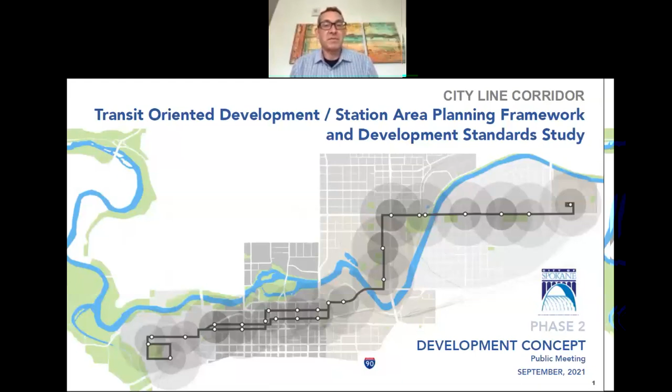That looks great. So as Colin mentioned, we're at phase 2 of what's called a Transit-Oriented Development Study, primarily for the City Line, which is a bus rapid transit line being constructed in downtown Spokane. Let's go to the next slide.

TOD, if you're not familiar, is land use and transportation integrated together with a transit route at its core. That typically includes a mix of housing, commercial businesses, jobs, and services concentrated along walkable and bikeable streets within a quarter mile of that transit route.

Why TOD in Spokane? It's interesting—transit-oriented development really meets market demands for mixed use, walkable development in urban areas. And in Spokane in particular, it's relevant to the city's growth strategy for investment along what are called high frequency transit corridors.

Our study purpose is to identify an approach for transit-supportive regulatory changes and priority infrastructure investments, things like walk and bike improvements that support these high frequency transit corridors.

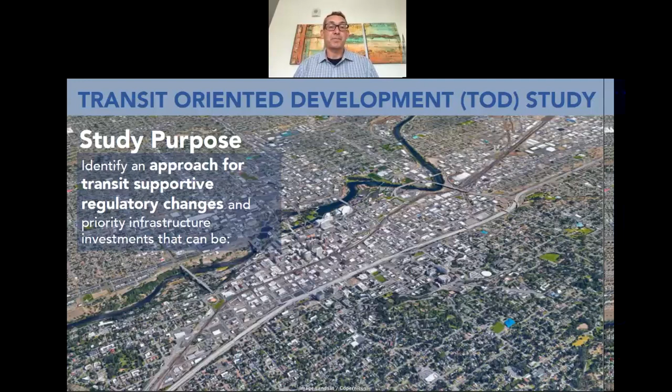Those include the City Line, which you see here in blue under construction, as well as a line along Division, Monroe, Regal, and Sprague. And in conjunction with supporting transit-oriented development along these high-frequency transit corridors...

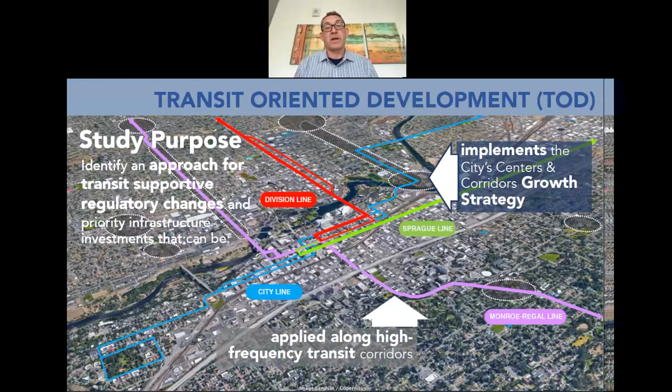We're also interested in implementing the city's comprehensive plan, which has looked for particular areas for infill and redevelopment. Much of these sites, called centers and corridors, align with the high-frequency transit routes. So we've got a bit of a dual purpose here.

As I mentioned, the City Line is the project we're studying—our initial test site, so to speak. That alignment is 6 miles long, beginning on the west at Browne's Addition, moving through downtown, north up through the University District and Logan neighborhood, and then continuing east through Chief Garry to its terminus at Spokane Community College. That's going to include 28 stations within these 5 districts.

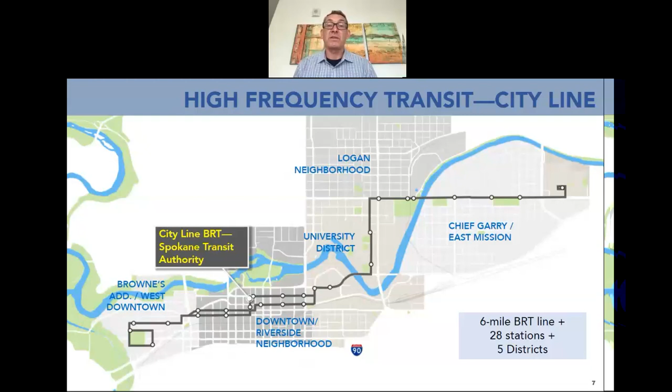The City Line is a $92 million investment in the corridor, and its core is creating premium transit service, starting with a comfortable and low-impact electric vehicle—so lower noise, less emissions. The line will run frequently throughout the day: peak time, 7.5 minutes between buses, up to about 15 minutes between buses later in the day. So reliable and frequent.

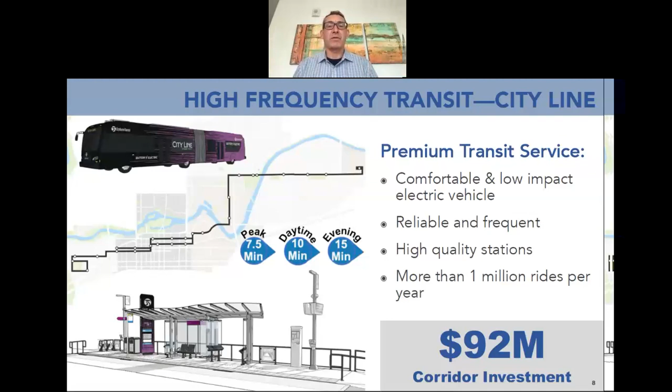STA is then constructing a number of high quality stations, which we often call platforms, that allow for level boarding of the bus. There'll be covered shelters, ticketing you can purchase at the station, they'll be well lit, and they'll include things such as reader boards so you know when the next bus is coming. That $92 million investment is really intended to promote increased value along the corridor.

The estimate is $175 million. For our work, we want to look at a particular section of the City Line to look at what the opportunities are for transit-oriented development to help leverage that growth strategy—not only in the investment in infrastructure for the bus, but how we can promote future development that uniquely serves a number of districts within our study area.

So that includes the Cincinnati Street corridor and the Mission Avenue corridor, and then those stations that run between the river and Spokane Community College.

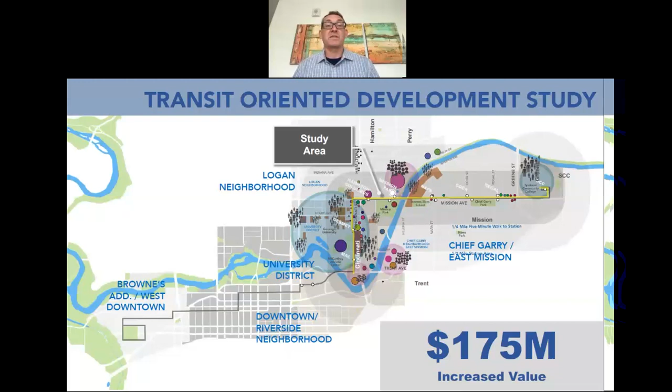The work we're doing to get to regulations really needs to be preceded by an understanding of the context along the corridor and creating what we call a station area planning framework. That's guided by three principles, three elements we're really focused on when looking at access to stations and what future development might be in the context of any given station area.

The first is we want to establish a multimodal transportation corridor so that we're linking station to station with continuous biking and walking facilities.

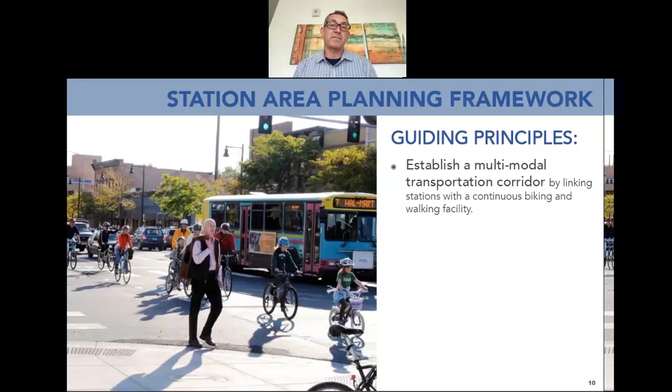We want to look to increase potential ridership through development and activity that support an active station environment, as well as walking and biking improvements that provide direct access between transit and the destinations people wish to go to at each station area.

Finally, we want to enable the station areas to achieve their development potential by supporting transit-oriented infill or redevelopment properties for people to live and businesses to thrive near transit.

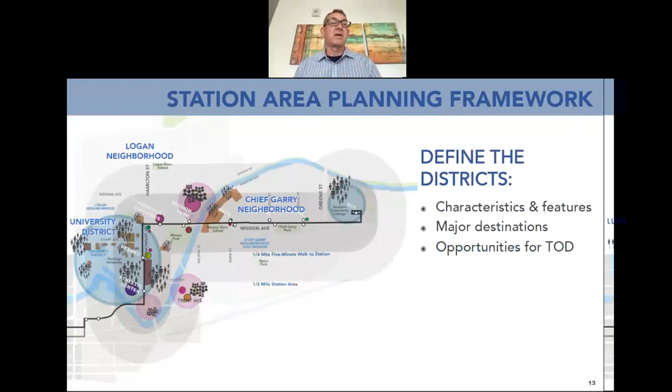Our work then looks to define each of these districts - the University District, Logan Neighborhood, and Chief Garry - to identify their basic characteristics, the major destinations, and where opportunities for TOD might exist.

The TOD opportunities tend to be within areas of aging manufacturing and warehouse sites, vacant underutilized sites, and large parking lots. The Centennial Trail is another key feature running through this station area.

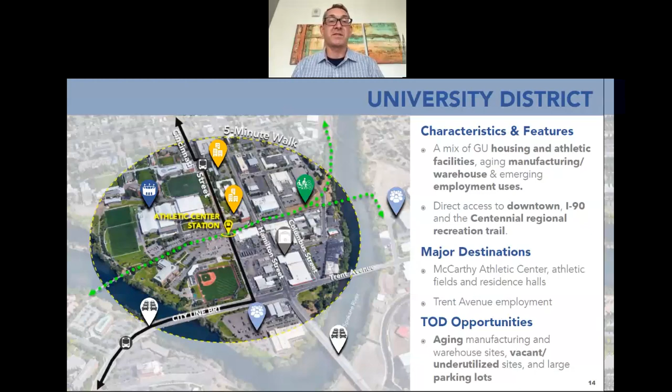As we progress north to DeSmet, this begins our transition between core Gonzaga University and some commercial uses on Hamilton into the Logan neighborhood. The Hamilton corridor is the nexus and spine of the station area between the DeSmet and Columbus Street stations. The major destination along Hamilton, from a rider perspective, is the Safeway grocery store.

As we move east along Mission Avenue, Mission Park is a major destination. We have a major employer with Avista, and of course the Aquatic Center. So there are a number of destinations - university, shopping, recreation, and employment - within this corridor. Primarily the TOD opportunities are oriented along Hamilton Street.

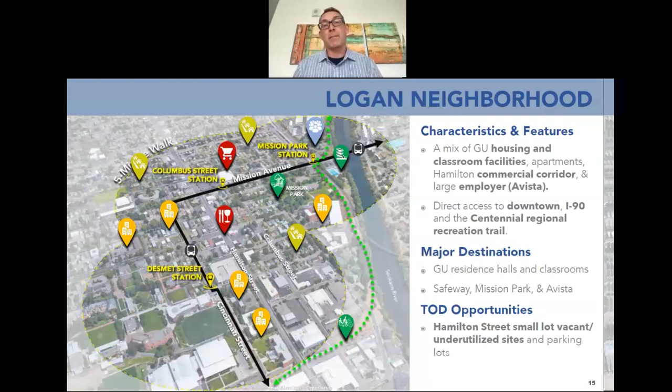As we transition further east along Mission Avenue, we cross the Spokane River and come into the Chief Garry neighborhood, which is predominantly single-family housing. There are pockets of riverfront apartments and multifamily housing along the Spokane River, and auto-oriented commercial industrial uses, primarily concentrated around Napa and Regal Street.

Clearly one of the primary destinations is Spokane Community College at the terminus of the alignment, but there are also a number of destinations that include the Stevens School and Chief Garry Park. The transit-oriented development opportunities tend to be along Mission Avenue at the station locations at Napa and Regal, where you have aging commercial, manufacturing, vacant, and underutilized sites.

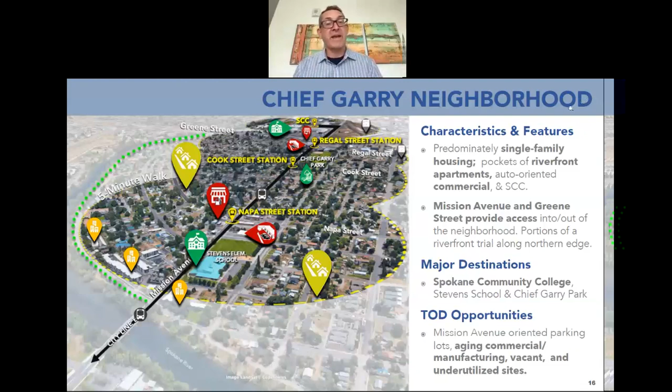Our first framework element that we want to address, having understood the basic context, is establishing what we call station area access routes. They'll address the need for station-to-station and station-to-destination access improvements. We'll look to fill gaps and propose new routes that complete the city's adopted pedestrian and bike plan networks, and will inform potential future infrastructure improvements that support transit access.

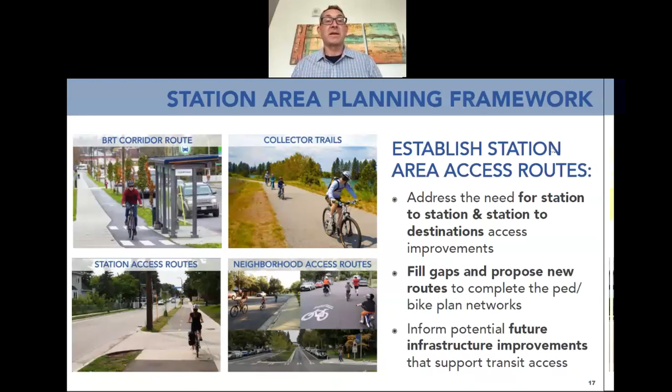We did an initial review and assessment of each of the station areas, and looked at where destinations existed, what were barriers to transit, what were barriers to potential transit-oriented development sites, and where areas lacked basic walk or bicycle facilities. That assessment led us to these primary findings.

First, we need to address Mission, Greene, and Hamilton due to the high level of traffic speeds and the need to improve safe crossings along those three roadways. Mission in particular lacks any bicycle facilities, as does Napa, which serves as a north-south connector within the Chief Garry neighborhood. But there are some really robust facilities on Sharp Avenue and Perry that just need to be extended to complete those networks.

There are gaps in the Riverfront Trail, primarily south of Mission Avenue on the east side of the river. Through our analysis, we were able to determine areas with auto, pedestrian, and bike conflicts where there's been accidents - for instance, locations where safe routes to schools could be improved because of a lack of sidewalks. So we want to create these station access routes that can address all of these topics.

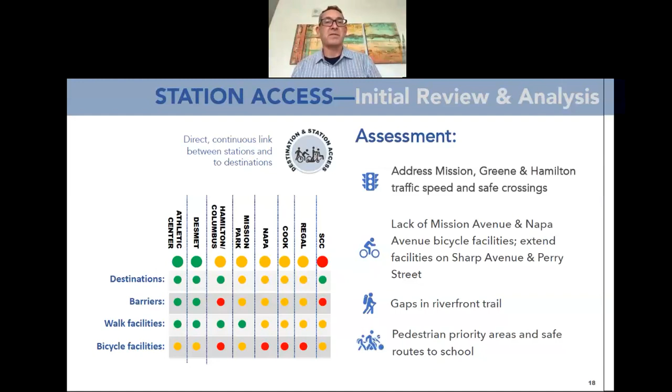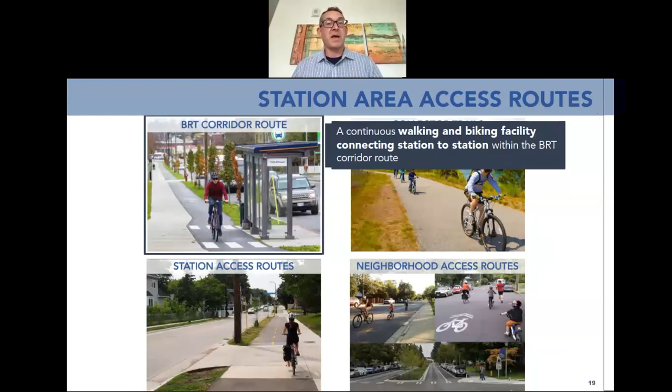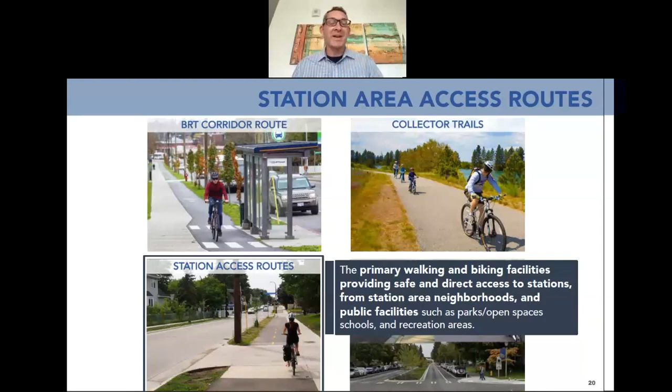The first hierarchy of routes is the BRT corridor route, which promotes a continuous walking and biking facility that connects station to station along the corridor. The next is the station access routes, which are primary streets for walking and biking that connect directly to the station from station area neighborhoods and public facilities.

Collector trails represent those access routes on the outer edges of the station area. These are part of your citywide and regional trail system, but they interconnect and in some instances intersect with the BRT corridor or other key routes that connect neighbors to destinations. So that's part of the system.

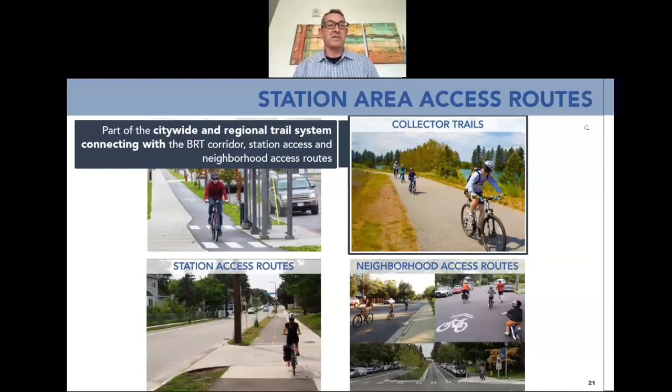Finally, neighborhood access routes are concerned with how we link neighborhoods to destinations within the neighborhood. Where it intersects with routes that feed to the station is also important, but we're also looking for connections that link schools to parks, for instance, which may run parallel to the BRT corridor. That establishes the framework for station area access within this study area, approximately a half mile from the stations.

I'll pause here for questions, but more importantly, have you all look at a survey question we have around station access routes. Okay, I have a poll here, and it's live, so feel free to answer a couple questions. Just want initial thoughts and reactions to this network.

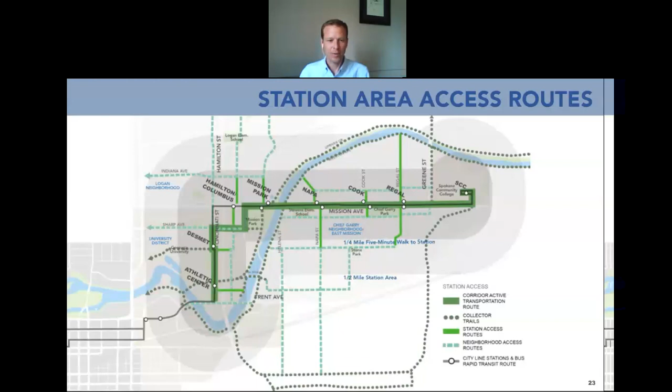So I'll close that and take it away, Jason. Great, let's move on to the next slide. This is going better than expected.

The next piece of the framework is looking at land use and transit-oriented development potential. Not all stations are the same, and not all development opportunities in station areas are similar—you tend to have varying degrees of intensity and certain types of development. Typologies help us support the neighborhoods we've defined and their district character and function, as well as inform the type and intensity of development and station access. Thirdly, we respond to local growth policies and plans, such as ped and bike plans and the comprehensive plan, looking at all three together as we establish these typologies for development.

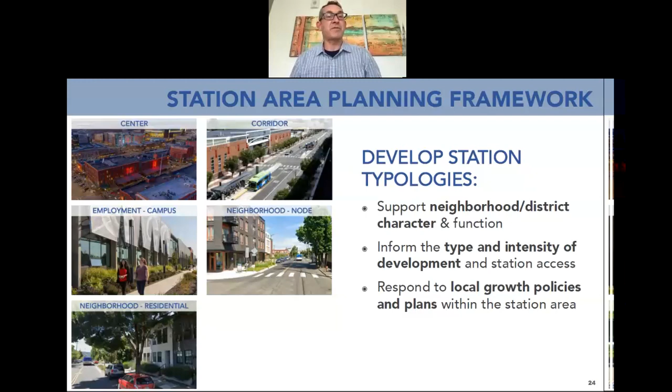The first typology is what we call a center station, typified by the highest density of development—apartments, condominiums, and townhomes—integrated with single-use or mixed-use buildings that include street-oriented commercial. Largely this type of development is at a district scale, quite often includes employment and some public amenities, and of course safe, direct, and convenient walk and bike access between the stations and development within that station area.

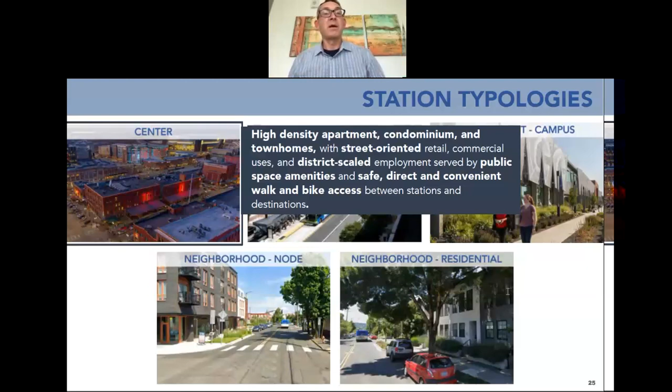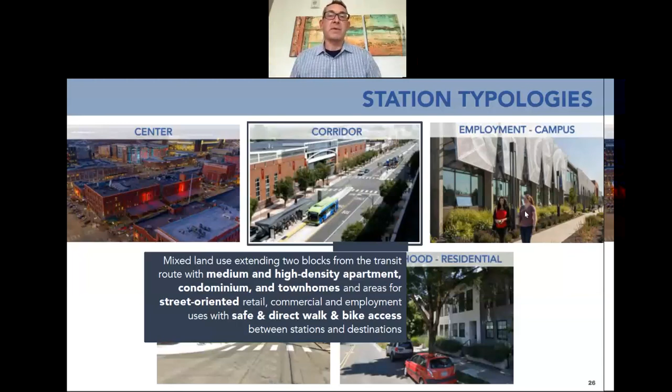The corridor is another piece that tends to be a linear connection—like Hamilton Street or Division Street—the physical form of a corridor. In a corridor-type station, development tends to be close to the alignment itself, with a mix of land use extending approximately two blocks from the primary transit route. It includes a variety of medium and high density apartments, condominiums, and townhomes, but also street-oriented retail and commercial, and safe, direct access to transit. It tends to be linear and doesn't extend too far from the transit corridor.

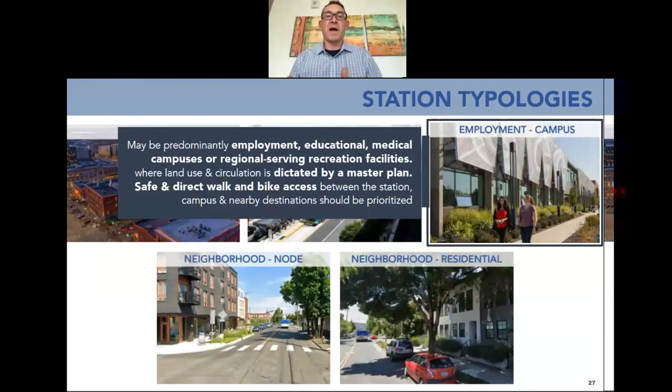Along the city line, we have Spokane Community College, Gonzaga University, and the Avista headquarters. These tend to be large areas that are master planned, usually by a university or a major employer, and largely decisions about land use and to some degree circulation are dictated by a master plan. It tends to be highly coordinated between the city and those large property owners.

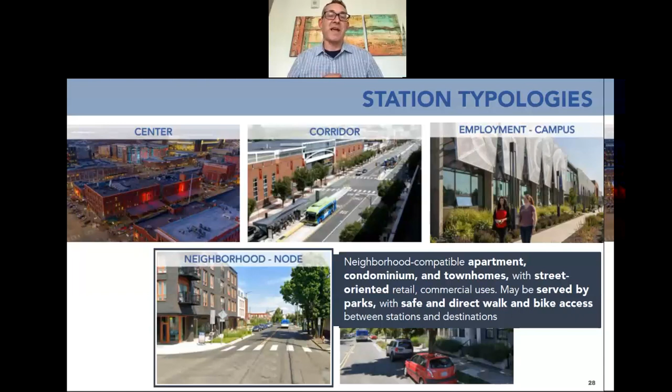As we ratchet down the scale from a center or corridor, we see in Spokane these unique neighborhood nodes, where there's the opportunity to create neighborhood compatible apartments, condominiums and townhomes—adding multifamily to what are typically single family neighborhoods, but along certain corridors. These nodes provide street-oriented retail, commercial, and neighborhood-serving uses, and promote access to transit to those destinations within the scale of a neighborhood node.

Next slide. Portions of a BRT alignment can have stations predominantly surrounded by existing single-family residential, where opportunities for development are fairly limited, but there may be opportunities for infill housing. These areas tend to be close to neighborhood parks and sometimes schools, and walk and bike access is critical to link residents, destinations, and stations.

So that encompasses five typologies that we've identified along the city line corridor in our study area. Next slide. If we could pause for one second, we had a question in the chat from Colleen about what the time frame is for action on these things.

I think it was in reference to the station area access network, but also all these things, so I can address that a little bit. And I should have introduced everyone from the city as well who's on the meeting: Tirrell Black, principal planner in the planning services department, and Amanda Beck, assistant planner.

I would say overall some of the policy and regulation changes would be the first outcomes of this study—comp plan amendments and that type of thing, and potentially zoning changes, but that would be a follow-up to this study. As far as infrastructure improvements, things already in our master plans would be quicker; they could be done as streets are resurfaced, as part of the plan. Things already part of the plan could be done more quickly, but things that are new and need more vetting from all the city departments would be a little further out to get into the plan and then acted upon.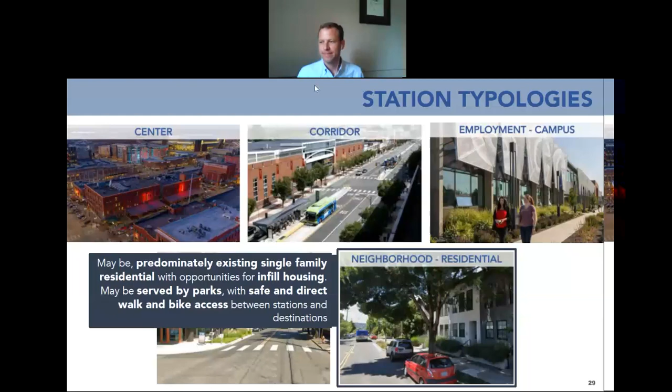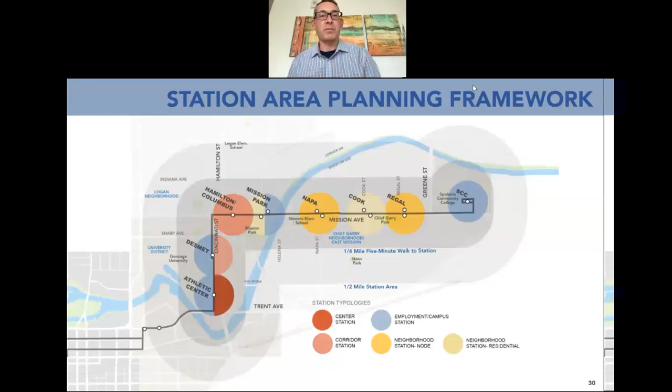Those typologies have then been arrayed along the city line alignment. So now that we have a basic understanding about the districts and some of the impediments to access, it's time to look at where the opportunities for transit-oriented development might occur. That's the next piece of the framework. Next slide.

And transit-oriented development tends to follow this pattern. We're looking for infill sites, so opportunities that include vacant and underutilized sites, or for instance, large parking sites where there's multiple properties with a single owner. That, I think, to Colleen's point, is where we see change potentially happen sooner rather than later.

The other thing is that we have to be cognizant of the station area assets and barriers to transit-oriented development. That could be a lack of interest in redevelopment, or the design of streets and access improvements that are really making it difficult for pedestrian-oriented development to succeed.

And I think on the upside, we can also look in neighborhoods and identify where there's certain types of development that haven't occurred today that might actually be ideally suited for transit-oriented development, providing housing choice, commercial services, a small amount of employment close to residents, and opportunities to improve public facilities such as parks and access to schools. So let's go to the next slide.

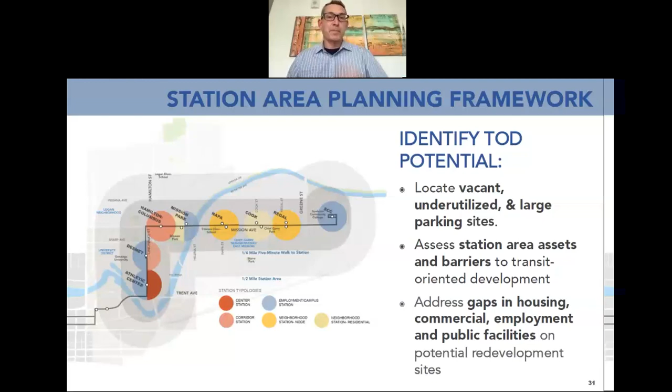In our initial review and analysis, we looked at these factors: do stations have transit-supported development today that we can build off of, or are they lacking? In certain station areas, what are the gaps in development? Is it a lack of multifamily, or employment, or commercial and retail uses within a given station area?

We also looked at the city's analysis on displacement risk, knowing areas that tend to be more susceptible to displacement with redevelopment than others. And then finally, on the ground, physically looking at vacant, underutilized, and potential redevelopment areas and mapping those within each of the station areas.

So 3 stations really surfaced as potential areas to look at development scenarios: transit-oriented development scenarios at the McCarthey Athletic Center, at the Napa station, and at the Regal station. The Athletic Center station is on Cincinnati, down near the river. Napa is at Mission and Napa, and Regal is at Regal and Mission.

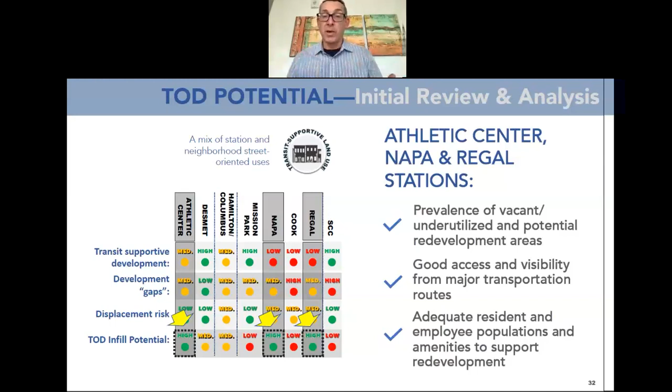And here's what we found: those 3 sites, with prevalence of vacant, underutilized, and potential redevelopment areas, all have good access and visibility for major transportation routes, meaning we're not relying on future people living in the neighborhood to support different uses. There's typically infrastructure in place today to help support redevelopment, including an adequate resident or employee population and amenities likely to support redevelopment.

We're going to start first with the McCarthey Athletic Center, designated in the comprehensive plan as what's called a center, which tends to mean higher density mixed-use development associated with this corridor along Hamilton. The desire of the comprehensive plan is to stimulate pedestrian activity with mutually reinforcing land uses. As part of this study, we want to add the layer of integrating development and transit with improved walk and bike access along key routes.

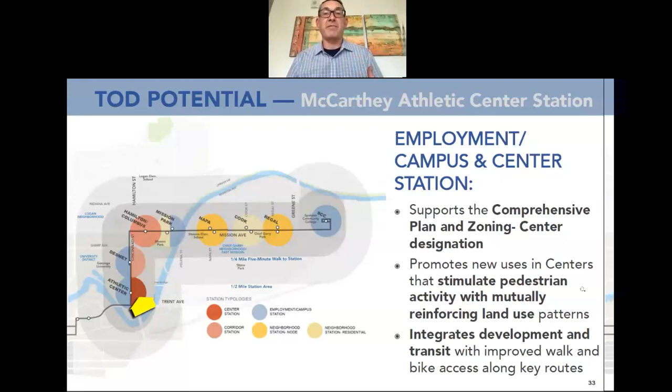So let's take a look at what a transit-oriented development scenario might be for the McCarthey Athletic Center. Looking at the station assets, there are some basic fundamentals that support redevelopment in this district.

The first is the drive-by traffic, high visibility along the Hamilton Street and Trent Avenue corridors. There's great access to downtown, great access to I-90. You generally have some built-in population to support housing, commercial development, and dining, including the Gonzaga University resident and staff population. There are some employment uses nearby.

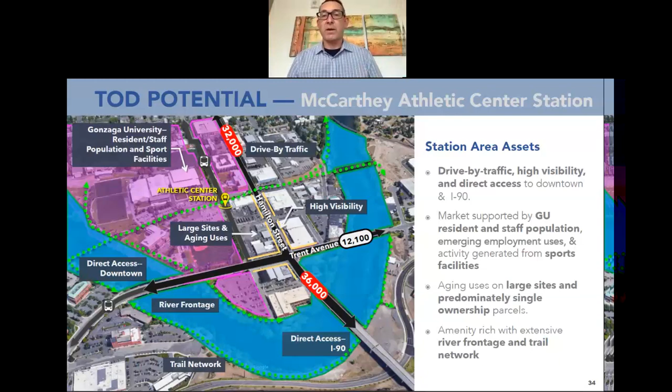The opportunities for redevelopment may exist on those aging uses on large sites and predominantly single-ownership parcels. And this district is really amenity-rich, with extensive river frontage and the trail network you can see here on the dotted lines circumventing most of the district. So it's a real unique opportunity in the city of Spokane.

So let's look at the next slide. The barriers: as much as Hamilton and Trent Avenue are assets, when it comes to stimulating pedestrian activity and supporting bike access, they're also difficult because of excessive traffic volumes, primarily on Hamilton, less so on Trent. It's very difficult to have development really want to front up against those streets.

So what we're seeing in terms of development trends along Hamilton is a lot of buildings with inactive frontages. When new development comes online, it tends to push itself away from, and not engage, Hamilton Street. So I think it's important that we look for other streets in the district as a potential spark for new development over time.

We do need to improve the trail networks. If we can complete a full trail frontage around this district, I think that would help a lot. So that's a barrier, to fill that incomplete trail network.

And then the other piece is, how do we get through this hump of limited direct river access so that we can utilize the Spokane riverfront as really an activity center that promotes development in the district, not just for people who live there, but also people who work and visit the area as well. So let's go to the next slide.

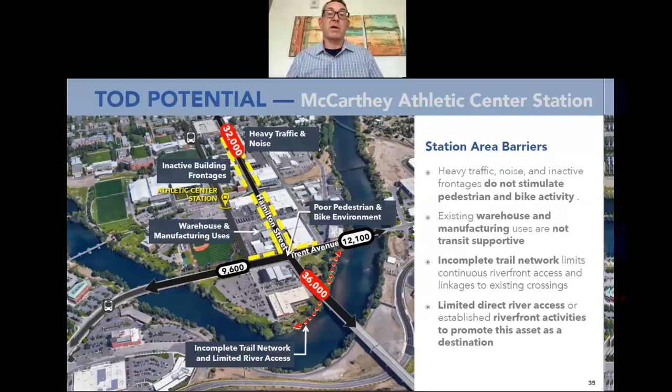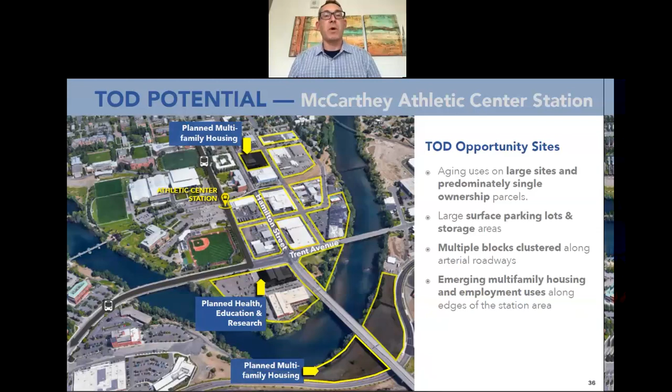If we think about development trends and where some of these sites are transitioning, the Philomena, for instance, is a new apartment project happening on the north side of the district, and that's linked to an existing project, the Matilda, which was commercial and multifamily. And of course we have the core of Gonzaga University resident halls. So we have this emerging housing district on the north side.

As I mentioned, on the south side, the Riverbend apartment project is bringing approximately 260 new apartments to the south side of the river. And Trent Avenue is becoming this employment corridor, where today on the west side you have WSU and their facilities, the new Health and Education Research Building going online at Trent and Hamilton, and your existing office development along Trent Avenue on the east side of the Spokane River.

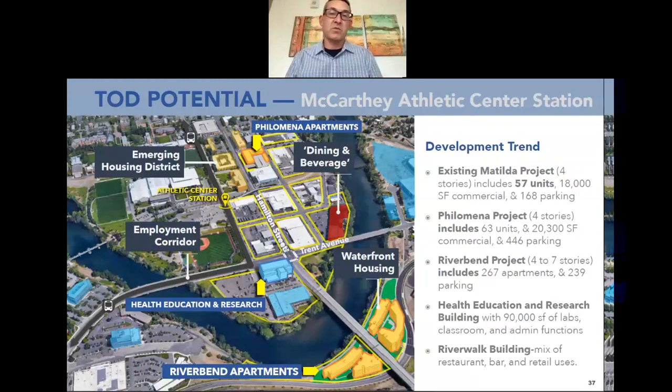I think one of the other interesting nuggets of what exists in the district today is what I'd call a dining and beverage destination with the Riverwalk project, where you have a brewery and some offices and a range of uses, but you have a great old existing historic structure to really build from.

What I think is critical to help kickstart redevelopment, in particular pedestrian-oriented and transit-oriented development, is to define what we would call a hub, or create a street-oriented destination. The typical retail configuration is a quarter mile in length, and Springfield Avenue potentially provides a location to do that, where you could assemble edge-to-edge retail, commercial, and service uses along that three-block stretch, anchored on the west by Gonzaga University and the riverfront on the east.

So what we're looking to do with a hub is create a low traffic street that can accommodate a high quality pedestrian and bike destination, again with those edge-to-edge storefronts. We may need to look at a district parking site to help serve some of those commercial uses, so maybe carve out a block where we can basically park the vehicles and allow for the rest of the development to occur on multiple sites in the district.

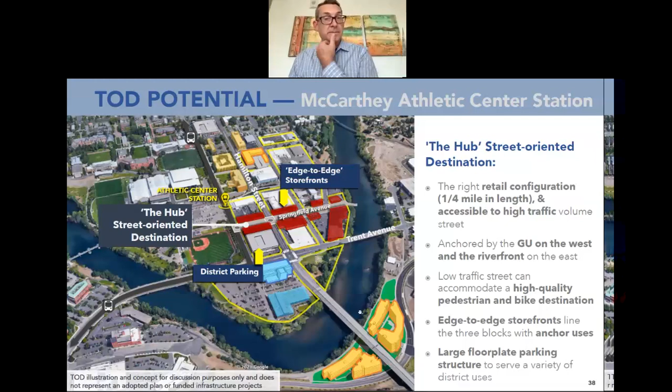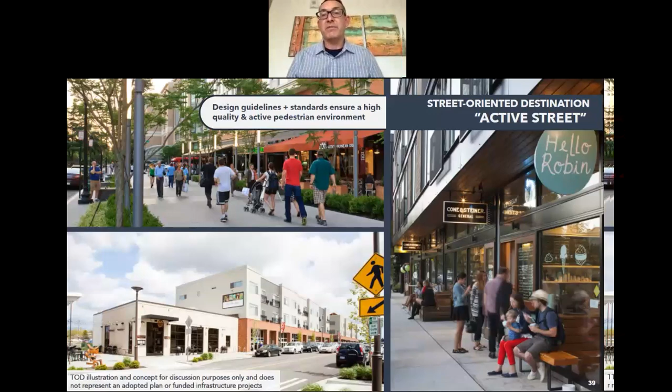What that street might be, we're calling an active street. I think one of the closest examples to what this Springfield Avenue might be is to look at Kendall Yards, and how they were able to assemble a couple of blocks with commercial services, retail and dining on both sides of the street in a very walkable environment. They've got a park and plaza at one end, and I think that's a model that could potentially be replicated here. In terms of regulatory, we're informed by ensuring that from the regulatory side of this process we're defining design guidelines and standards that ensure a high quality and active pedestrian environment. So that'll be part of our work too, in terms of recommendations down the road.

For retail to be successful, they need what are called anchors. Anchors are those uses that bring a lot of people into the area, and grocery stores tend to be the number one anchor when it comes to creating a hub or street-oriented destination. We know some basic facts about grocery stores: they typically add 30% yearly additional sales for the adjacent inline shops.

In this area, looking at the TOD potential sites, there's clearly room potentially for a 20 to 40,000 square foot full service grocery between Hamilton, for instance, and Columbus. It may be able to incorporate local models like Yokes, Rosauers, or Fresh Basket. Where I have that arrow pointed is really an ideal location from the grocer's perspective, because you've got great access and visibility along Hamilton and Trent, as well as the ability to siphon in that PM commute, those people leaving work to pull into the grocery store.

So Safeway has followed that same model a half mile or so up the road.

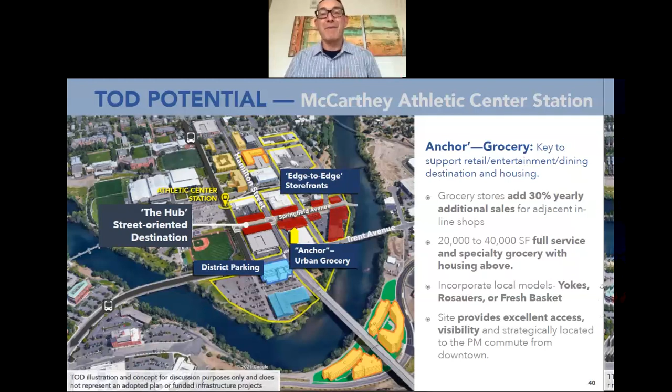Next, look at the Riverwalk as an additional anchor along the east side of Springfield Avenue. This may be a great location to expand on what's already happening with the brewery, to really showcase local brewers, chefs, local cuisine, and local boutiques who can fit in a larger space area, while still maintaining some co-working and flex office since you have a number of buildings connected together. Another addition Riverwalk needs to consider is how to introduce more outdoor gathering on both sides of the building.

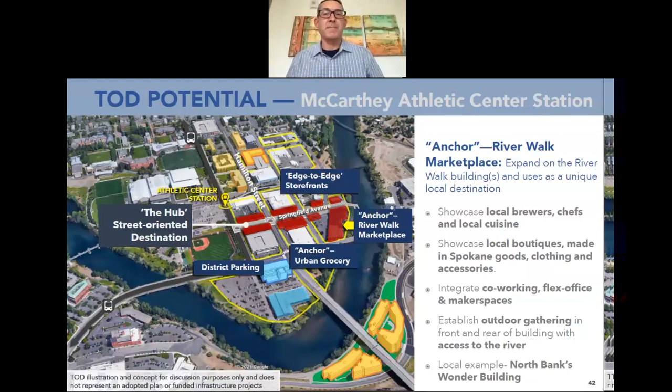Next slide. The other piece is how do we bring the waterfront into the district? How can that be a unique attraction with river access that extends the amount of time spent in the district? Those purple dots represent strategically located public access points and non-motorized watercraft landings, for instance.

And of course, we want to complete the riverfront trail so that it goes completely around, under Trent Avenue and under the bridge crossing at Spokane, adjacent to Hamilton Street. Next slide.

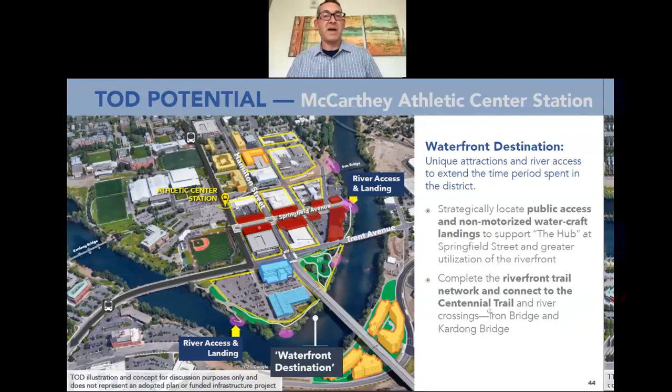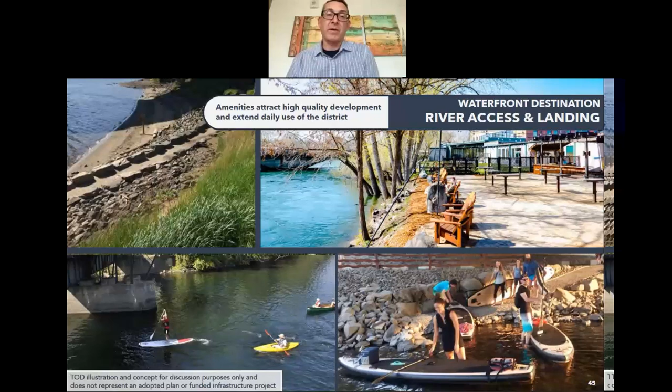This illustrates that the brewery today is already engaging the riverfront. Could these landings extend from that place, and are there other opportunities to create these conditions? The image on the lower right is actually what you've already built underneath the Division Street viaduct. There are local examples that translate really well to a variety of locations along the waterfront here at the McCarthey Athletic Center station. Next slide.

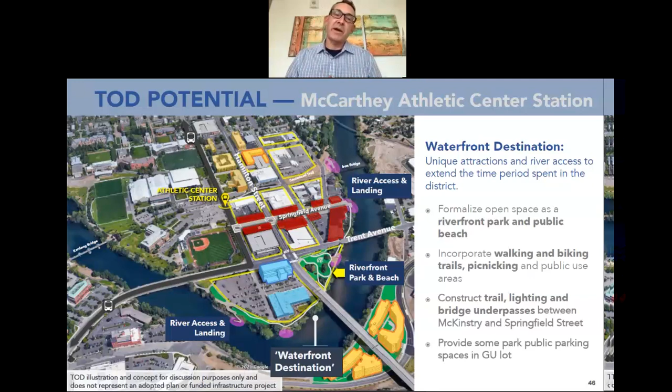There's also that triangular property just south of Trent Avenue and just east of the major crossing of the Spokane River that may become a formalized riverfront park or beach. What an amenity to add to an area that's wholly underutilized today.

Next slide. These amenities really help attract high quality development, which leads into where there are opportunities to create not just multifamily buildings plopped on blocks, but an actual housing district, what most people would call a neighborhood, with a range of multi-story apartments, condominiums, and townhomes. We can address affordability, market rate, and mixed income projects that are likely to be higher intensity, taller buildings that may need some type of structured parking or podium.

The amenities then, parks, park blocks, and trails, are critical for this type of development to flourish and for these sites to become major housing redevelopment sites that create a district. Let's go to the next slide.

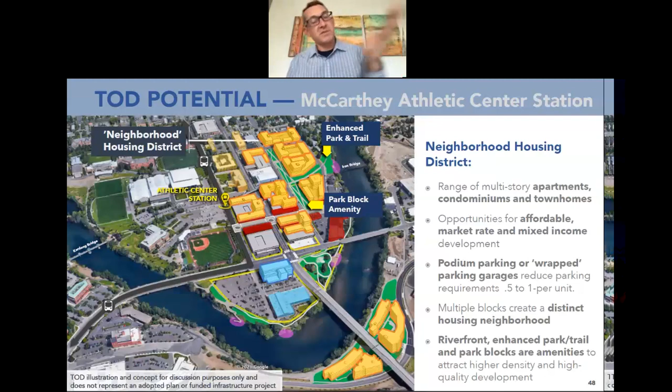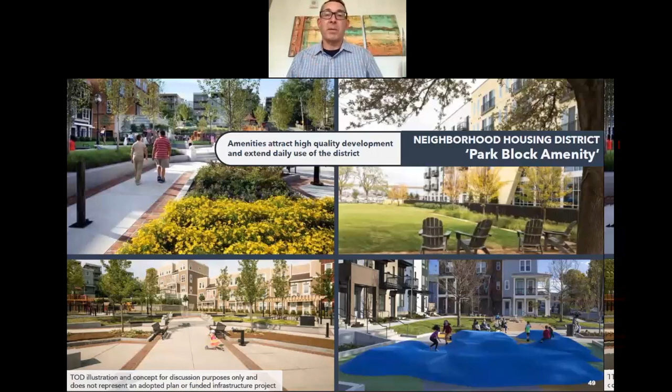What do those park amenities do? They create a variety of different spaces for this higher intensity development to sit against, creating passive green spaces and spaces for kids to play. So it's a family neighborhood as much as it's a single and young professional neighborhood, with areas for public gathering in those park blocks. Next slide.

Here's the last element, and I think the warehouse provides an interesting sports and fitness amenity. People living in urban housing are sometimes obsessed about fitness, and it's a great asset to have literally in the core of the district.

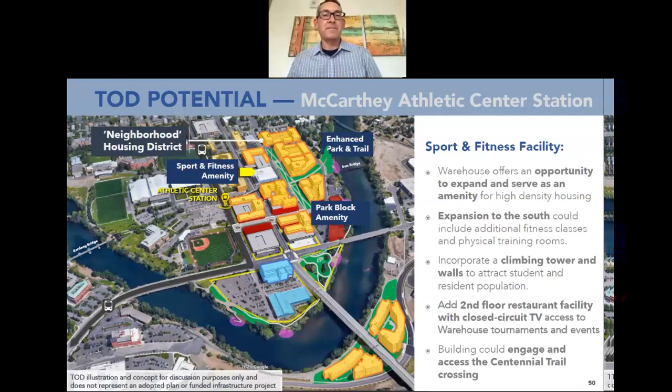Maybe there's an opportunity to expand the function of that facility to include additional workout rooms, a variety of different fitness options folks are looking for. Maybe consider a vertical climbing wall that could engage the Centennial Trail overpass. As an asset, it's a great one, and if it could be expanded on, even better, to support a robust and vibrant neighborhood.

And then finally, the Health Peninsula Employment Cluster at Trent Avenue is a bit of a no-brainer with the health and research facility being built next to McKinstry. Those two sites on the north side of Trent and on either side of Hamilton become, I think, extremely desirable for high-tech education, co-work, and research type facilities.

Okay, if you'll go back one more slide, then let's go to your survey, if that's okay.

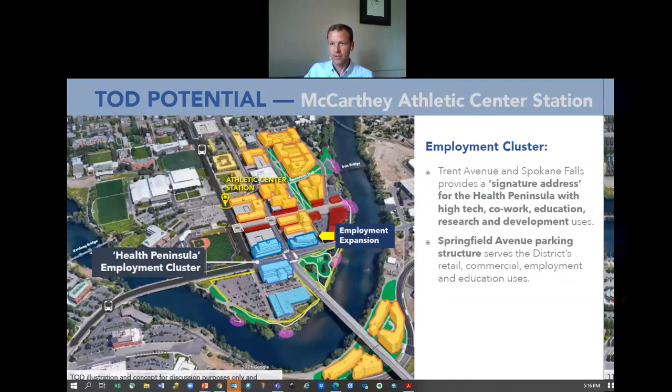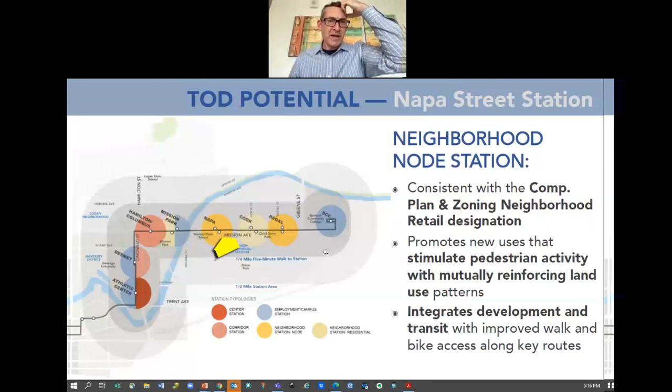I realize we're pressed for time here, and I'll try to speed it up a little bit. So next slide, we're at Napa Street Station. The barrier is obviously Mission Avenue. We've had conflicts with auto, ped, and bike along that roadway, heavy amount of traffic. There's some TOD opportunity sites.

Development largely tends to be auto-oriented. There's a poor pedestrian environment in that there's narrow sidewalks and no buffer for folks walking up and down Mission Avenue. And of course, completing the trail network to the south would be a benefit, but today there is no trail access south of Mission Avenue along the Spokane River.

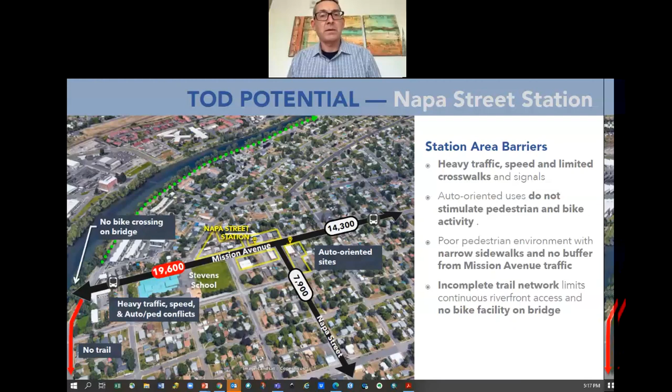I think to address initially the access issues along Mission Avenue, this is one proposal, and this is a way to address the guidelines for the project, which is to try and create a continuous walk and bike facility that connects station to station, and to address walk and bike deficiencies, in particular around Mission Avenue. So looking for enhancements to some crossings, improving those connections across Mission Avenue are important.

One concept, and a way of doing that while also promoting TOD, is trying to create some commercial development that serves the neighborhood, which really needs on-street parking to survive. So a thought about changing Mission Avenue would be to convert what's a 4-lane roadway today to 3 lanes. That would allow walk and bike facilities to potentially take over one of those lanes, let's say on the south side of the street.

That could extend to the bridge crossing over to the Aquatic Center and Mission Park. So now we can get both walking and biking across that bridge, and the bikes can continue down Mission Avenue, running both directions side by side within that lane on the south side of the street.

There's some key intersections and crossing improvements that I think are critical to study over time. One is near the east side of the bridge at the Spokane River, and then at Napa Street, to ensure that we've got good, safe access across that roadway to connect to transit, but also to connect to the riverfront trail.

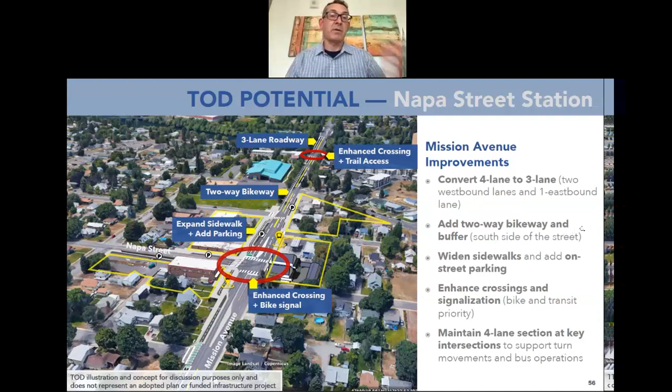And then by utilizing some setbacks on existing properties, we may be able to add on-street parking, which would really serve commercial development. So this is just an idea of how we can stimulate TOD and improve access along Mission Avenue, while also serving the BRT.

The assets in terms of commercial development are the drive-by traffic and access that Mission Avenue and Napa both afford. The neighborhood is fairly amenity rich, especially from a family perspective, because you've got schools, parks, and the riverfront trail. Directly at the station, there are aging, vacant, and underutilized parcels.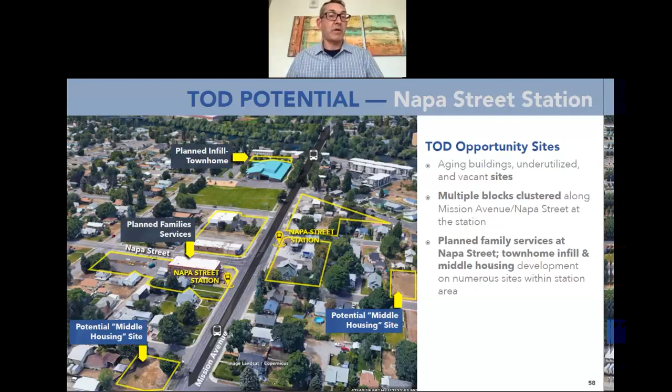And the planned family services facility is being built out at the Promise building you see there with the arrow—Family Promise is in the old grocery store. Next slide.

Looking at those trends, on the top right side of the image, we might see multifamily apartments built, similar to what you're seeing along the waterfront, and ideally we'd want to incorporate some ground floor commercial along Mission Avenue. The service center building to the left is probably not in need of redevelopment, but likely a great candidate for bringing in new tenants and adding commercial uses that aren't there today.

Family Promise is providing shelter services, but maybe over time they purchase the house just to the south or east of them and institute an affordable housing project. Transitioning from shelter to more permanent housing may be an opportunity for them to expand their services, and at the same time create some commercial adjacent directly to the Napa Street station on the east side of Napa.

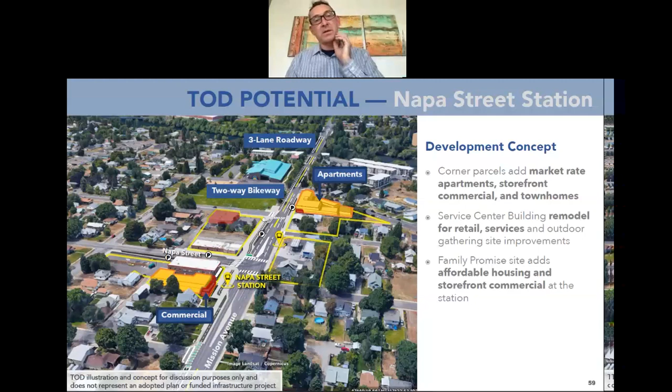Next slide. As development happens and is constructed, you tend to see, down the road, a market established here, which means possibly behind the Family Promise building you might see market rate apartments built—maybe a 3-story project.

And certainly the Hai's mini market, with initial investment over time, kind of sets the stage for mixed use development on that property as well.

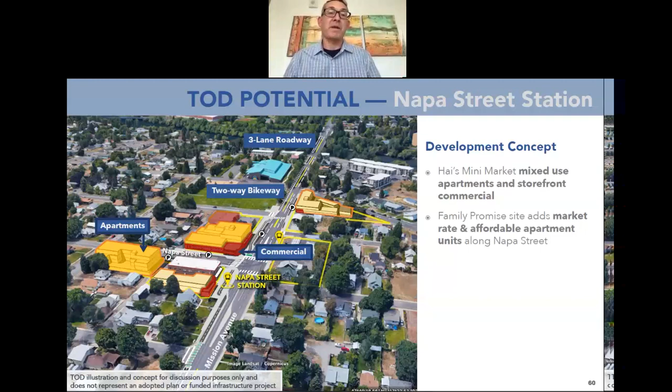Next slide. I think you would likely then see round out of additional projects come online, if those initial projects were successful—the auto repair building, for instance, and then maybe conversion of the single family homes that are zoned commercial or neighborhood retail today could convert to townhomes or some other type of use.

Next slide. One more—our survey is ready to discuss the Napa Street TOD potential, with the same principles or goals being asked: how well does that concept support living and working near transit, and how well does it support transit ridership?

Colleen had a question about how these changes are funded as the poll gets filled out. Like you pointed out, Colleen, getting developers involved, but creating the policy and regulation framework where it makes sense for them to get involved will be the primary outcome of this study we'll follow up on—making those policy and regulatory changes. As far as public infrastructure goes, that would be similar to other bikeway, trail, or street improvements.

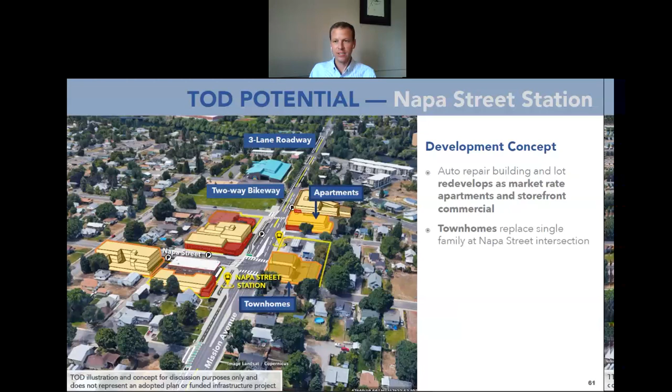Close the poll there, share the results. It looks like, similar to the other questions, we're ending up mostly in the well or very well range for how these development concepts support those goals. I'll turn it back to you, Jason.

Great, let's go to the next slide and take a quick jaunt down to Regal Street. Really, the barriers that exist here are very similar to Napa—Mission Avenue is what it is, and it's in need of at least some basic improvements that support walking and biking.

There's a number of sites, even more so—this is a bit of a larger scale than what we saw in terms of development opportunity at Napa. Potentially we're looking at a block or two off of Mission Avenue, primarily on the south but also the north side. There are a number of sites where TOD potential may be down the road, but certainly dealing with Mission Avenue and Greene Street, some enhancements to intersection improvements are warranted, as well as potentially at the station.

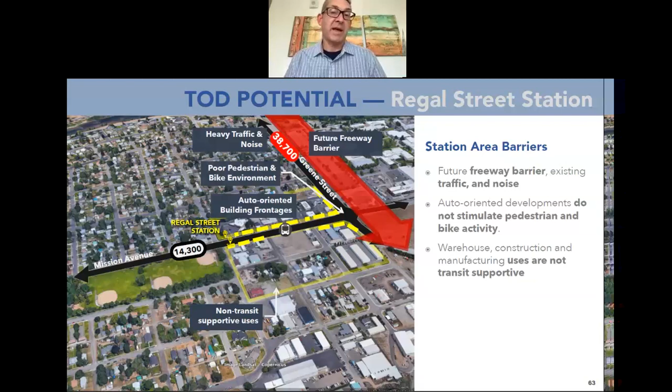Next slide. The Mission Avenue improvements we discussed at Napa would then extend up past Chief Garry Park and into the TOD opportunity sites here at Regal—again that 3-lane section, a 2-way bikeway on the south side of Mission Avenue, and some enhanced intersection improvements, particularly at Regal to get to transit, but also at Greene, because if this bike facility were to extend further east to Spokane Community College, being able to get through the Greene intersection is going to be extremely important from a safety perspective.

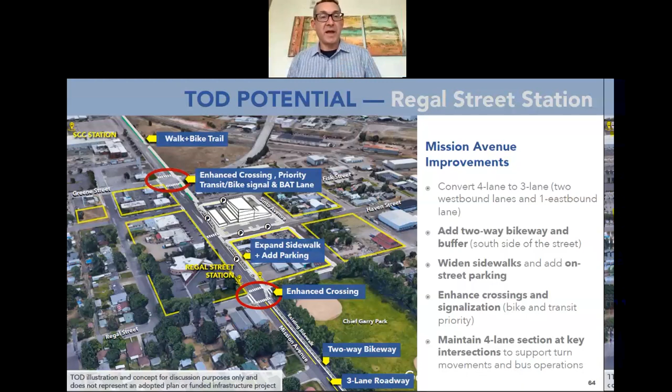So the assets obviously are the drive-by traffic, which can support commercial development along Mission and Greene. And there are a number of sites that we can then look at for a TOD development scenario. So let's go ahead and do that.

There are some ongoing projects similar to Napa that are establishing development trends. One is the Planned VOA Homeless Teen Services Building, which will also include a health center built up to Mission Avenue. There's a planned young adult shelter remodel shown by the arrow on the left side, and just to the north of that is a planned new apartment building. So we're actually seeing some apartment development interest here at the station area, and I don't think it's a surprise given how close it is to Spokane Community College and with future transit coming online.

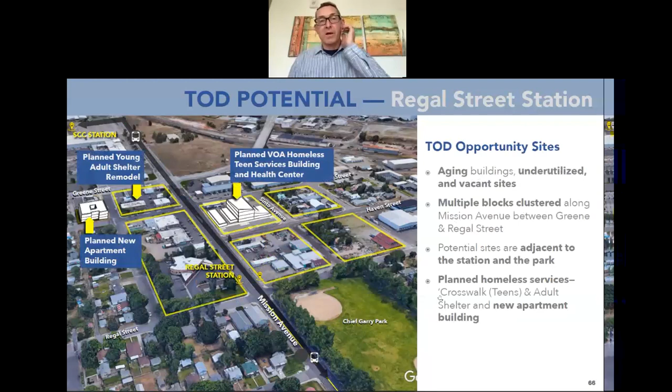So that's a bit of the trends we're seeing. Let's look at the next slide, and how can we capitalize on that? I think the first step is looking at some of these properties that have single ownership, with working businesses on a portion, but also some vacant and underutilized segments.

There are really two properties that have surfaced. One is the Progressions Credit Union on the left side of your screen, directly at where the new westbound station would be going to downtown. And then across the street, where you have a construction company, they have a number of storage areas and lower use areas that maybe they could carve out for redevelopment while still functioning as a business.

So what we're thinking is apartments with some ground floor commercial, strategically located next to the VOA facility, but also at the stations. Next slide. And that may be a range of affordable and market rate housing.

For instance, maybe townhomes on the left, with affordable housing more in proximity to VOA. The Mission Village Commercial Center has a significant amount of land area behind the commercial development that might be adequate for affordable or market rate housing.

And then there are a couple of vacant parcels on the right where you see townhomes that might be great for a first phase townhome development directly adjacent to Chief Garry Park. Next slide.

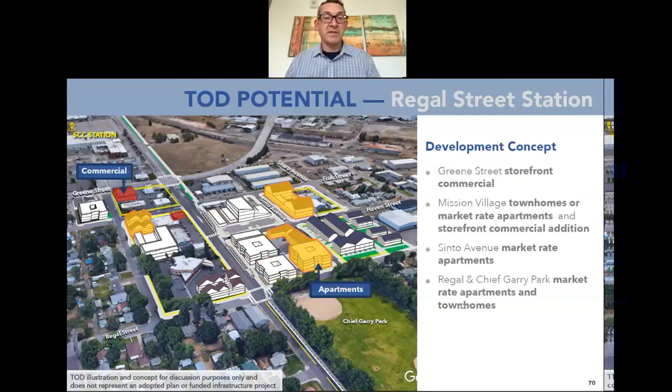Next slide. And then we sort of domino to these additional sites for some more infill. Maybe it's commercial up at Greene because you've got that great access and proximity to drive-by traffic, and maybe some additional housing infill on the sites you see here.

So that's generally how you might see phased TOD development at the Regal Station. But you can see it's a substantial amount of area, and it takes advantage of Chief Garry Park, and it takes advantage of potential commercial development because of the drive-by traffic on Mission.

And then I'll give it to you, Colin.

We're at the end here and we have one last poll, so I'll open it up. It's the same questions applied to this station area regarding how well does this support living and working near transit, and how well does it support ridership?

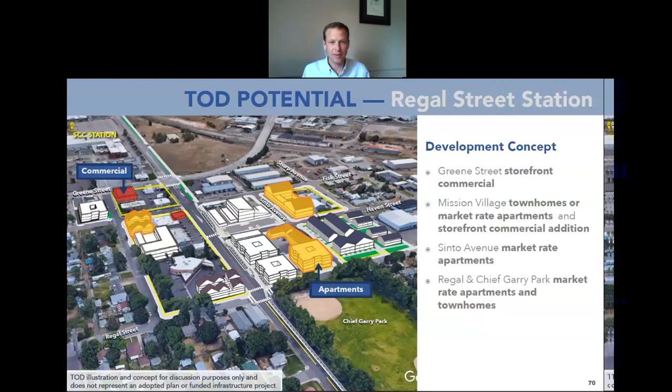So there are next steps. We're a little over halfway done with the work, but we'll come back and take a final look at refining the typologies and station access routes based on what we've heard from the community and our technical advisory groups, and then come back with recommendations. The study is just coming back with recommendations, so none of these are proposed changes or asking the city to adopt a capital improvement program around any of these street improvements, but to provide a little more definition, some direction on maybe priorities for some of these improvements.

And then really the meat of what we're being asked to do is to establish this regulatory framework—what can we apply to these station areas in terms of regulations that could potentially promote these types of development scenarios that we've seen. So we're in the process now of coming up with some initial ideas for that, and then we'll bring those recommendations to staff. We're going to vet those with our technical group, and then we should come back to the community at some point to share what that regulatory approach would be as well.

And in the end, we'll finalize a document which says these are the final recommendations and these are the next steps the city might pursue to address the regulatory changes and further studies.

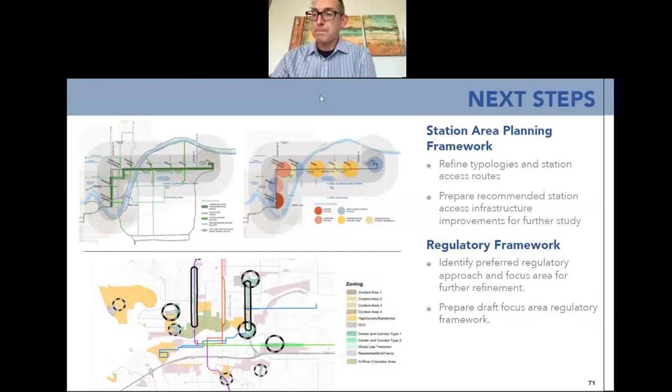I will point folks to the website, and there was one more question in the chat from Karen: since the centers and corridors concept was never fully implemented, how do you propose implementing these TOD opportunities in areas like Sprague or street-oriented destinations?

I think that is really what this study is pointing us towards—updating the centers and corridors concepts and the zoning associated with that. And that'll be part of the next phase, really fleshing out those regulatory adjustments and changes. Do you want to speak to that at all, Jason?

No, I mean, I think you've covered it. But when we're talking about the McCarthey Athletic Center, based on what the city's done in previous work, you would expect a sub-area plan potentially to provide more definition, bring on a lot more partners and engagement so that we can really vet what that—I mean, I showed one scenario and I think there's some positive attributes to that, but that has to be vetted with a larger group.

And that may build—you would want that sub-area plan to build a constituency that would help implement that station area in particular. But until you have those conversations and bring the partners together, both community, private development, and the city, it's really hard to forge a path forward. So there's a little bit of work that needs to be done over there, in a good way.